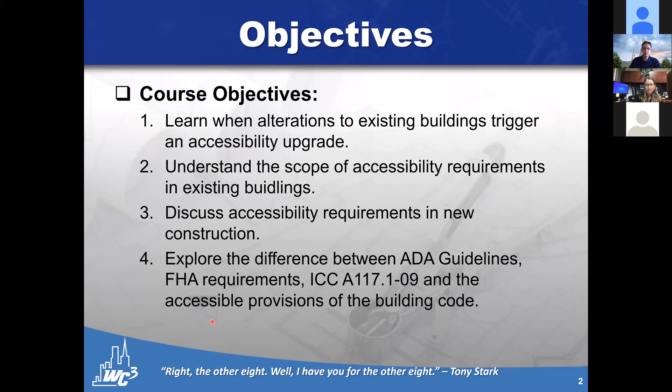You'll notice down at the bottom of my screen, it has absolutely nothing to do with the rest of the presentations, but I like to watch movies. So there are random movie quotes at the bottom of most screens. Most of the time they have absolutely nothing to do with the slides, but if you get bored, because talking about building codes all day is the most exciting day you guys are going to have, right? So if you get bored, just read the quote at the bottom of the screen and chuckle if you get the reference. If not, I just do want to warn you, if you get all the references, that means you're pretty much as nerdy as I am, so be careful there.

All right, jumping right into it, we're going to look at these 3 different books today. We're actually not going to jump too far into this book, the ICC A117. We don't have enough time to jump into it. This is the reference standard, and I'll talk about it a little bit in a second. But we're predominantly going to talk about building code requirements for accessibility, which are going to be found in the IBC and for existing buildings under the IEBC in the 2018 codes that are adopted currently in most jurisdictions in the state of Nevada.

Looking at this, we're going to talk about accessibility. I want to highlight here where ADA and accessibility comes from. So this is a standard that's put together. It still is noted by ANSI, the American National Standards Institute, but it is now officially under the title ICC A117.1. The latest version is now the 2017 version, but that is not being referenced until the 2021 building code. So the currently referenced standard in the 2018 code is this one, the 2009 ICC A117.

Now, this is a standard that was put together by a panel of committees for persons with hearing impairment, the deaf and blind community, as well as those in wheelchairs, little people, and other groups of persons with disabilities, who have come together with code officials to create a building code standard. This standard was mirrored, I'm going to get the date wrong because I don't have it on my slide today, in the mid-90s with the ADA guidelines.

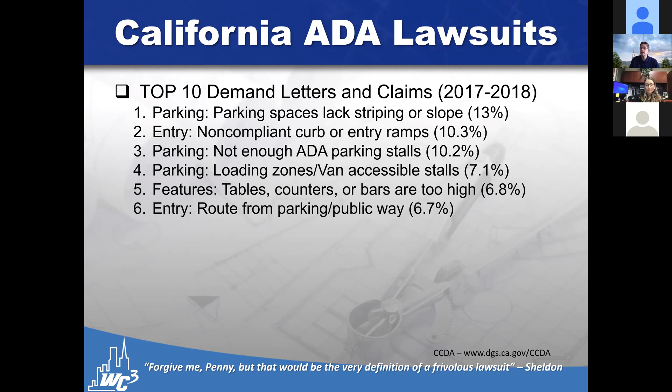The next one is that there's a non-compliant curb or entry from the parking lot to the building. 10% of all lawsuits are that one. That there are insufficient ADA parking stalls accounts for another 10% of all lawsuits. That there are not adequate loading zones or van accessible stalls accounts for an additional 7%. Interior tables, counters, or bars are too high is 6% of the lawsuits. The accessible entrance to the building is not on an accessible route from the public way. It accounts for 6.7% of the lawsuits.

Inadequate signage for parking stalls notifying which ones are accessible is another 5.3%. General violations, interior features not meeting requirements, account for about 4% of lawsuits. And the route having incorrect door hardware or thresholds accounts for 4%. And finally, service equipment, pools account for 2.2%, rounding out the top 10. Now, this is not all lawsuits, obviously, but these top 10 items account for 70% of all lawsuits filed in the years 2017 and 2018. And so you're going to see that the majority of lawsuits will be one of these top 10 demand items.

Now, the next one that's kind of frightening is that over 50% are related to the site, not the building itself. And the reason I say that's frightening is because, quite simply, whenever I do a TI review, I often ask, I need a site plan. I need to know what's going on with the exterior of the building. How do you get into this building? And the response is, well, that's outside the scope of my review. Well, this leads to the question, is it outside the scope of my review? If you're not updating the site as part of the interior remodel, you're leaving yourself and the owner open to over 50% of all lawsuits.

The reason being is it doesn't matter how nice and accessible your toilet room is if you can't even get into the building in the first place. And so predominantly, these are where the majority of lawsuits are going to occur. We need to be very cautious about making sure that the site plan is up to date and meets code. And we'll talk about when that is not required as we look into the IEBC.

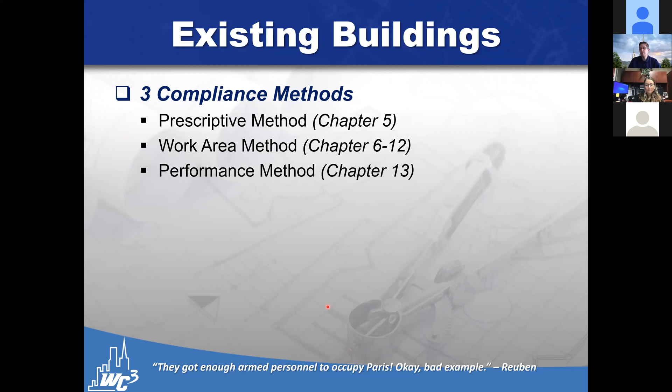So there are 3 different methods. We have the prescriptive method for dealing with existing buildings, work area method, and the performance method. Under the 2015 code, there were separate accessibility provisions for each of those, depending on which method you used. As of the 2018 code with the reorganization, now accessibility requirements are found in section 305, and these accessibility requirements are the same regardless of what method you use.

So if you've got an existing building, you'll go to IEBC 305, and this gives you the scoping requirements for what accessibility provisions you have to meet, regardless of whether or not you're doing an addition, an alteration, change of occupancy, and what method, prescriptive, work area, or performance, that you're going to use for the rest of the design. Everything's going to come out of that section of code.

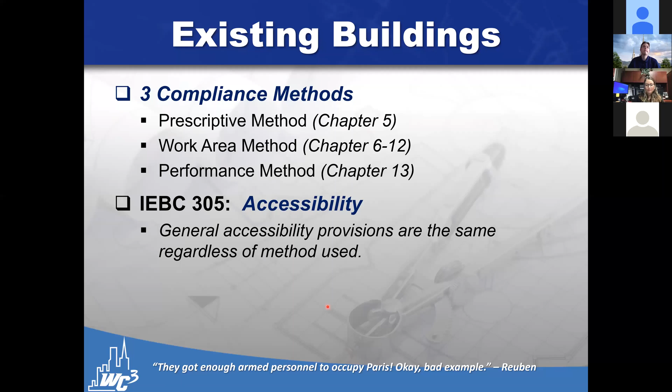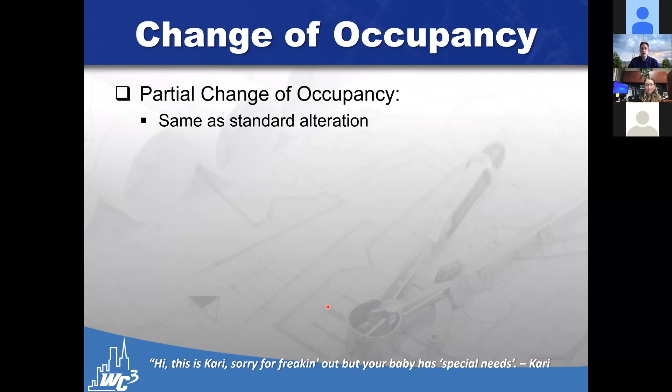So looking in IEBC, the first one we're looking at is a partial change of occupancy. If you've got a building, you're modifying a partial change of occupancy. The most common one I see here is I'm going to change a portion of a warehouse into an office space. That's a change from an S occupancy into a B occupancy. That would be the exact same as if it was an alteration. So the portion of the building that's changing occupancy counts as an alteration, an altered space.

If you provide a complete change of occupancy, meaning the entire building is going to change. This is maybe I'm taking an old grocery store and converting it into a gym, or I'm taking an existing office building and I'm going to turn it into a hospital or a doctor's facility. So anytime I make a modification from one occupancy into another and I change the entire building, this comes into play. I still have to have all new and altered elements be accessible, but in addition, now I must also provide at least one accessible entrance to the building.

I must provide an accessible route to the primary function of the building, and we'll talk more about primary function in a bit. I have to provide adequate accessibility signage for restrooms, accessible doors, entrances, and so forth. I must provide accessible parking where parking is provided. Now, this is not saying where accessible parking is provided, it must be compliant. It says where parking is provided for that facility, accessible parking must now be provided for that facility.

If a loading zone is provided for that building, or a drop-off zone, like a porte cochere at a hotel or at a hospital entrance or so forth, we'll talk more about that when we get to scoping on the IBC, it also has to be made accessible. And so these items that may be existing elements now have to be upgraded to meet the plan.

Notice that we are going to upgrade several site features, accessible parking and loading zones, as well as an accessible route and entrance into the building, all based on interior remodeling only. So the scope is now going to be expanded to include site work because they have a complete change of occupancy of the interior of the structure.

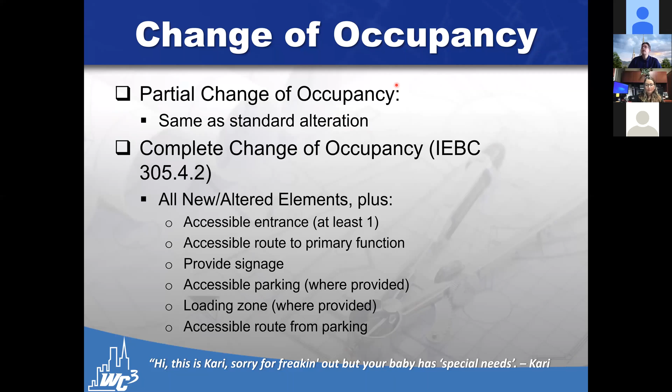As we modify these existing buildings under FHA guidelines, there's no requirement to bring these old outdated type B units into compliance. So there's no accessible route upgrades. However, you would still need to make at least one level accessible and may need to upgrade some of the type B units inside the building, but no accessible route to those units.

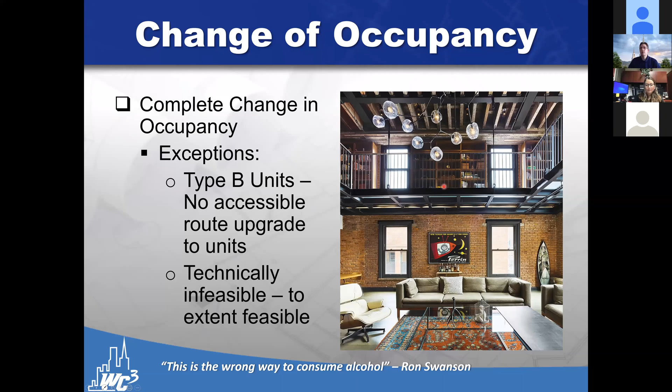The other one is technically infeasible, where it becomes technically infeasible to meet the current requirements of the code. You're only required to move it forward to the extent feasible.

Now, looking at technically infeasible, the problem I run into is it's often misinterpreted. What technically infeasible says in the building code is that full compliance would require alteration of a structural load-bearing member, or is not possible due to site constraints, typically meaning property lines or other things where you don't have the ability to adjust items.

I want to clarify that because it does not mean it's too expensive, it's not part of the scope of work, or it's inconvenient. I've had a lot of people say, well, remodeling the bathroom is going to cost more than my entire remodel. Well, that's great, it's expensive, but unless you have to move a bearing wall to update the bathroom, it's not technically infeasible. It's only technically infeasible if you had to move a bearing wall, or if there physically isn't space inside the building without moving a part of the building to do so.

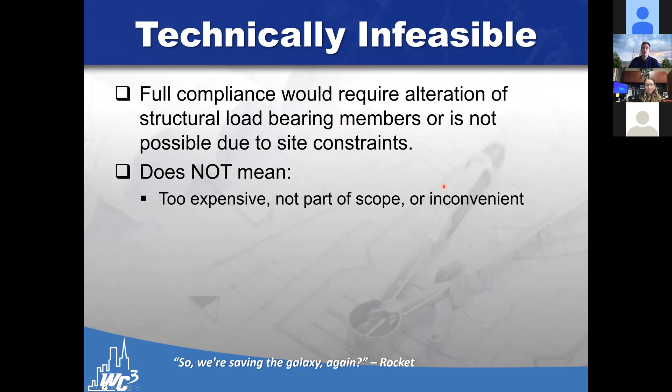The other point is technical infeasibility only applies when specifically referenced as an exception. So for the additional requirements in the IEBC for a change in occupancy, for example, it references technical infeasibility, and you can get out of those requirements slightly because it's technically infeasible.

Again, remember, just because it's technically infeasible doesn't mean you're exempt entirely. You still have to bring things up to speed, up to code, as much as is technically feasible.

So a stair may not have the proper width to count as an accessible means of egress, but you might still end up having to provide an area of refuge at the top and bottom, two-way communication devices, and so forth. You may not be able to install an elevator, but you would still have to install grab bars and so forth in the bathroom.

So again, we're going to look and see what scope there is. If there is anything that you aren't going to be able to meet the requirements for due to technical infeasibility, you just need to specify what the infeasibility is, what structural load-bearing members or alterations cannot be done due to site constraints, and then what methods or what extent it can be completed, what is feasible as part of that construction.

Please realize that there are some upgrades that may be required even if they're technically infeasible. So even though you will require modifications to the structure, there are certain times in which the code will mandate them. Again, you can only use technical infeasibility to get out of a provision if the references directly say so. There needs to be an exception in the section you're looking at.

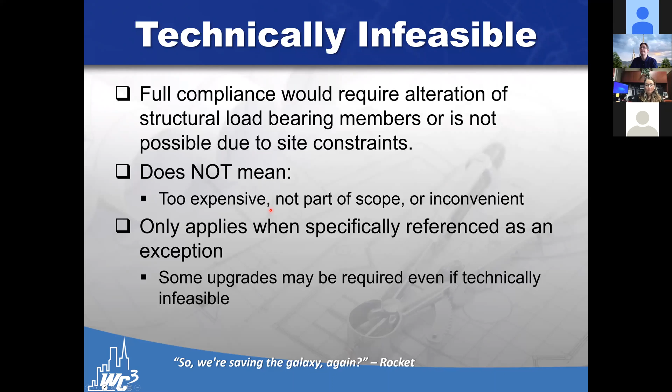But when we add additions and we're looking at things, the way the code addresses that is all new elements, everything inside that funky looking building being added on, has to be fully accessible. And if I alter a primary function, or the addition includes an area of primary function, I'm going to have to meet the primary function requirements, which we'll talk about shortly.

The exception is if it's not located on an accessible route. I should clarify that - it's not that an accessible route doesn't exist, because there are several existing buildings that don't have an existing accessible route. But if an accessible route is not required to that space, and you're in a location of a building that does not require an accessible route, you don't have to bring that section of the building up to code. You do not, for alterations, have to provide an accessible means of egress.

Now, this is a change in the 2018 codes, whereas before, for all additions, alterations, and modifications, you never had to provide an accessible means of egress. Additions do have to have an accessible means of egress now. You do not have to do it, though, for alterations.

Privately owned type A units.

Type A units are unique to the building code. If I'm in a type A unit and I own it myself and do a remodel, I only have to bring it up to type B. Type A means it can be converted into a fully accessible dwelling unit. But if I'm not disabled, I'm not required to make my unit a type A. So even though it was a type A when I bought it, if I modify it as the owner builder, I only have to meet the type B requirements.

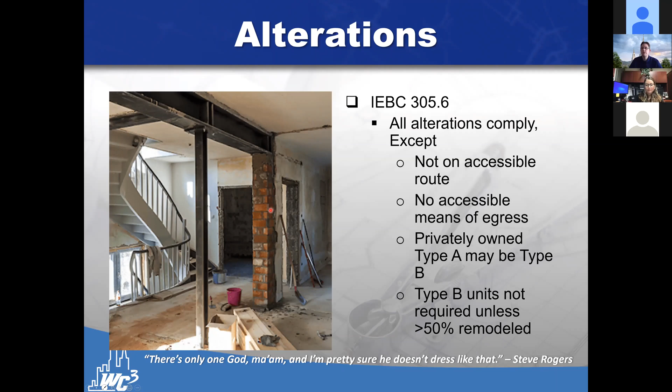So looking at this, the next item is entrances to buildings, and we're going to look at scoping. When I'm doing an alteration, there are provisions limiting the scoping. Normally, if you're modifying an entrance, the building code says you have to make it accessible. Except if I'm modifying a secondary entrance to a building, and there's already an existing accessible entrance, then I don't have to make this one accessible.

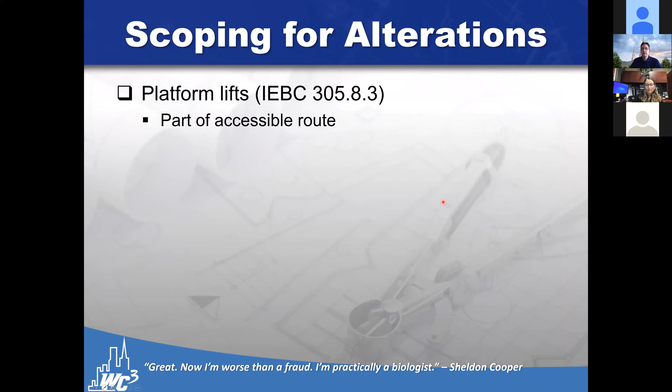If I install a new set of stairs or an escalator in the building, I always have to include an accessible route, so I have to install an elevator. The exception is if there were no major structural modifications. The idea is, if I'm cutting a hole in the floor and moving bearing walls, adding beams and posts to install a stair that is not accessible, then I can also cut a hole in the floor and add beams and columns to install an elevator or lift to make that route accessible as well.

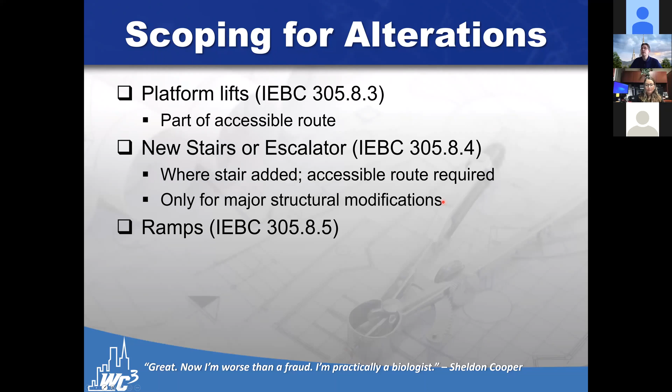When modifying existing ramps, particularly curb ramps, I'm allowed slightly steeper slopes. For ramps up to 3 inches, I can go 1:8, and for ramps up to 6 inches in height, I can go steeper than 1:12, but not more than 1:10.

When modifying dwelling units, only new or altered dwelling units count toward determining the number and type. So I may have a large existing facility and add on a new dwelling unit or group of units—only the new dwelling units count when determining the number of accessible, type B, or type A units I'm supposed to install. I ignore all those that are already on the site and existing.

Jury boxes need to have a wheelchair space. The wheelchair space is not required if it's an existing facility.

Toilet rooms - you can get out of toilet room modifications where it is technically infeasible. The code says that if it's technically infeasible to update the toilet room, you can install a single unisex toilet room instead of updating the bathroom. You can still count all the fixtures inside the non-accessible existing toilet room, except you would have to provide a new unisex restroom on the same floor level.

There was a question about platform lifts in a tenant improvement. Yes, inside of a tenant improvement, a platform lift counts as an accessible route.

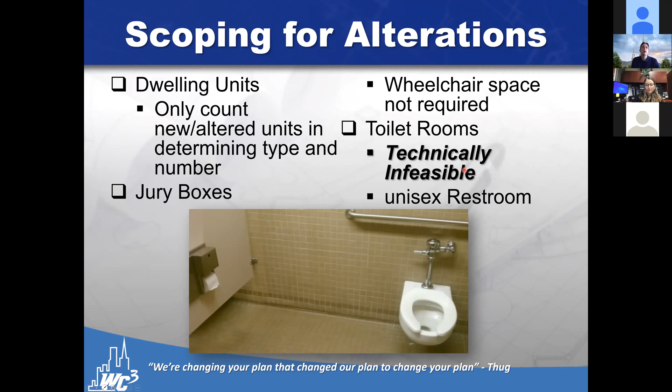Dressing rooms - if I'm making modifications to a building that includes dressing rooms where it's technically infeasible to update the existing dressing rooms, I can add one per gender that is accessible, but it must be located on the same level and in the same vicinity.

Fuel dispensers do not have to be made accessible, existing fuel dispensers. Thresholds - we're going to allow a slightly higher threshold in existing buildings, and existing amusement rides being modified do not have to be brought up to code.

It'd be really hard to come in and say, oh, we're remodeling the Matterhorn at Disneyland, now you have to make a wheelchair space inside this ride and completely change the design of that existing facility or ride. So existing rides do not have to be made accessible - the ride itself does not have to be altered in order to bring it into compliance.

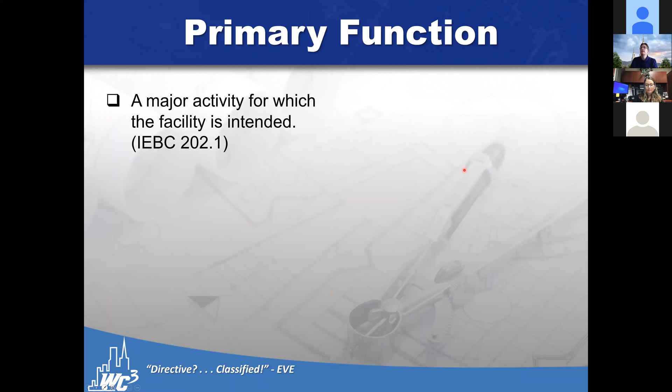Primary function - primary function is the major activity for which a space is intended. This is where things often get confused, because the code says that if I alter an area and it includes an area with the primary function... a lot of people confuse primary function with change of occupancy.

If your alteration happens in an area that contains a primary function, it doesn't matter if you're changing it - that would make it a change of use, which we cover in the change of use section. But if you're altering an area that has the primary function - for example, if I were to change this open cubicle office area and remove these cubicles to install built-in office areas, I would be making an alteration in an area containing the primary function, because this is an office and I'm altering an office space. So now I would fall into compliance. While it was an office before and it's an office still, I now have to meet the primary function requirements.

Some exceptions are if I'm modifying closets, bathrooms, or stairs - these are areas that are not part of the primary function of a space. So alterations of those will not trigger an alteration inside an area containing a primary function.

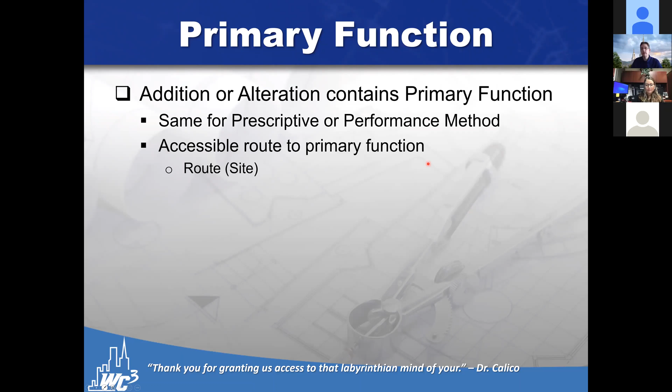So now they had to put in curb cuts and everything else because they were altering the sales floor of a convenience store. Parking: if there's parking provided, they now have to update the accessible route from the accessible parking to the building entrance. If there's no accessible parking, they need to provide accessible parking to give them a route to the entrance of the building. They need to provide an accessible entrance into the building, and they have to provide an interior route from the accessible entrance to the altered location.

So if you're on the second floor of a building, this interior route requirement is what's going to trigger you to have to install an elevator. If the building requires an elevator or requires an accessible interior route, you'll need to install it. So an alteration on the second floor will require an elevator or a lift to get you up to that second floor level if needed.

In addition to that, accessible toilet facilities must be provided. Now, to determine the number of toilet facilities that have to be accessible, this doesn't mean all the toilet facilities on site, but the toilet facilities required for the space being altered. So if I'm altering a conference room with 300 people in it, I would find out how many toilet rooms are required, men's and women's, for that 300 occupant space being altered. I must then provide accessible toilet facilities somewhere inside the building for those 300 occupants and an accessible route from the space being altered to those toilet facilities.

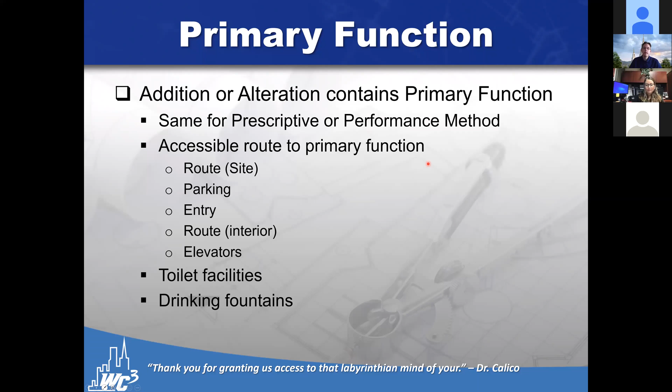Now, there are some scope limitations, because it wouldn't seem drastically fair if all I was doing was replacing some outlets and light switches in my office on the second story of a building to have to install an elevator, do some curb cuts, and everything else.

So the code says, first of all, if all you're doing is hardware modifications - windows, outlets, signage, etc. - none of that's going to count, even though it's in an area of the primary function. It doesn't really count as an alteration and will not trigger an updated accessible route.

If I'm just replacing electrical equipment or HVAC equipment, I don't have to modify the accessible route, add bathrooms, etc. to that space. If I'm doing fire protection, sprinkler, fire alarm system work, or abatement of hazardous materials, again, none of those items will trigger this.

And finally, if all I'm doing is alterations to improve accessibility - for example, I had a church and they wanted to add an accessible ramp inside the building to lead up to the rostrum so that people could get up onto the stand and speak. So they were adding this accessible route. Now that's obviously inside the worship room, the chapel, which is the area of the primary function.

And so it would typically trigger an accessible route - they have all the seating in there that would need to have accessible seating provided and so forth. But instead, the code says, no, no, no, all they're doing is adding an accessible ramp. So the scoping limited them to just those accessibility upgrades. Now, if they added other things, if they replaced the seating, if they modified something else inside the room, those would then trigger the accessible route upgrades.

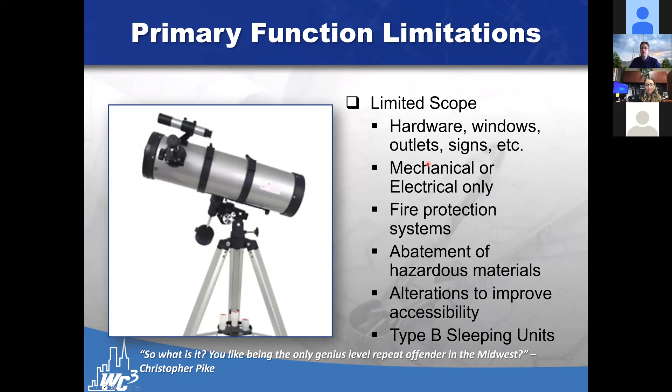So the first limitation - if you don't meet one of those exceptions - say I am making an alteration to a building, I'm going to add an office. Like right now in my office, we want to add a new door. We want to knock out a wall so that I have direct access from my office out into the bullpen where everybody else is working. So we're going to add a door there.

Well, obviously it's not going to cost me much money - it's going to be a couple grand for us to install a glass door and a window. But if I was on the second floor of the building, I now have altered a primary function, because obviously an office is the primary function of an office space. And so now I would have to install an elevator if we didn't have one already in the building. Well, that seems ridiculous.

A $2,000 remodel requires me to spend $50,000 to install an elevator in an existing building. The code says you're not required to exceed 20% of the cost of the alteration to the primary function. So what we're looking at is the primary function, the area that I'm altering inside the primary function.

I'm going to take the cost it takes to modify that, and then the cost of upgrading bathrooms, the accessible route leading to that space, the site plan, any of those items that need to come into play do not need to exceed 20%. Now, I do have to spend at least 20%, but they can exceed. I don't account for the cost of those in the calculation.

So I don't go in and say, oh, I'm doing $2,000 to modify the door and another $50,000 to install the elevator. So is it more than 20%? No, it's 20% of the $2,000 remodel that I was planning on doing, which would lead me to say $400 is the maximum I have to spend on the expanded scope of the accessible route.

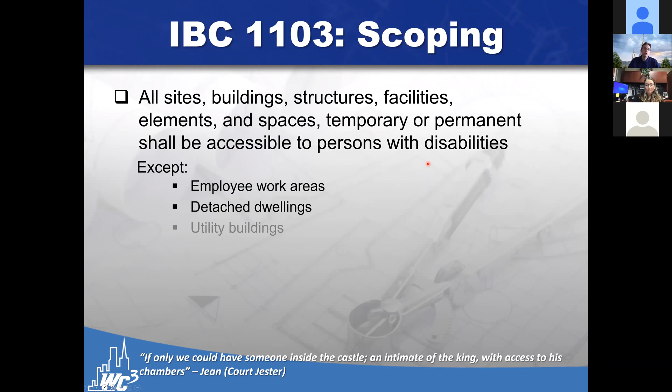And then it gives me a list of exceptions: employee work areas, detached dwellings, utility buildings, construction sites, raised areas, limited access areas, equipment spaces, areas in places of religious worship, highway toll booths, Residential Group R-1, daycares and R occupancies, detention facilities, and walk-in cooler freezers. So there are limited scoping requirements if I'm in any one of these items, and I'm going to talk about some of the most common ones.

One I will note is the highway toll booths; it used to say single occupancy structures. They determined that that wasn't a sufficient limitation, so single occupancy structures have to be made accessible, with some exceptions on highway toll booths, which we'll talk about in a moment.

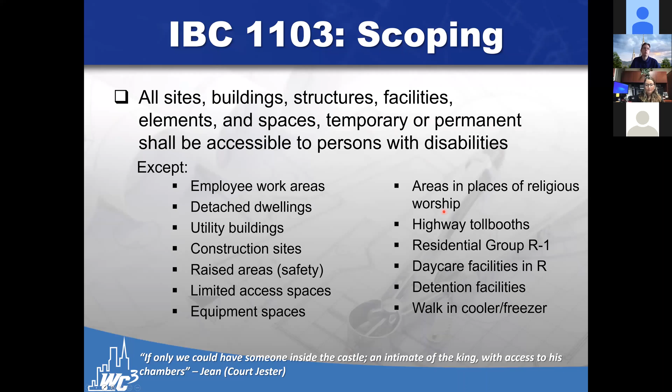So first of all, looking at employee work areas, the number one item I get coming in from an owner is, this is for employees only. Why do I have to make it accessible? I don't hire persons with disabilities. Well, I hope they don't tell me that, because that's illegal; they can't discriminate. That's discrimination. But we'll assume that based on their work requirements, they meant that they have to have fully able-bodied staff.

That's great. The code still requires that even if it is just for employees, you still have to be able to approach, enter, and exit the space. So you have to get in, get around, and get out in order to use the space. And then all public areas. Now, again, they say it's only open to employees. Well, public is any space such as break rooms, bathrooms, or reception areas in which the public might come in, or portions of the building that are not being used for work-related purposes. Now, the intent of the code here is the ADA guidelines, and we're stepping out of the building code, looking at federal law now.

ADA says I have to make reasonable accommodations to my employees. So if I hire a person with a disability, I must make reasonable accommodations for that individual. And so the building code says we're not going to force an employer to make their workspaces and the work area fully accessible on the off chance that they hire someone with a disability which requires that specific alteration.

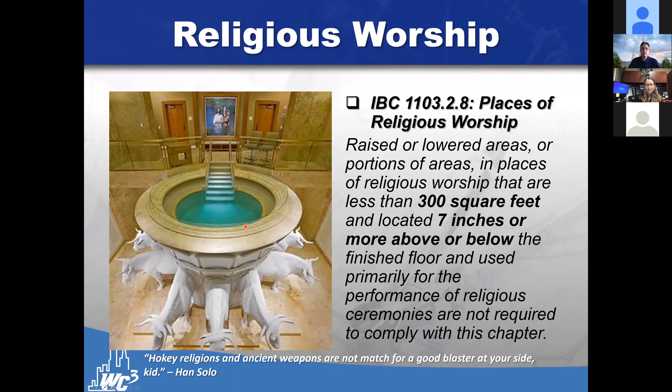General equipment spaces, anything that's a maintenance room, anything that's going to have maintenance equipment in it, something that's only going to be used by maintenance personnel, such as an HVAC room or even perhaps a janitor's closet. These spaces are not required to be accessible under the building code requirements.

Booths, highway toll booths, where access is provided only by bridges or above or below in a tunnel, are not required to be accessible. And so as we look at it, the concern is if I make this highway toll booth accessible, it has to be a wider booth. And as I make that wider, I now have to make the whole street wider. So there's a long push not to make these items larger or accessible. But the code has clarified and come in and said that this is all to be fully accessible.

Just think about it. As long as they only have an accessible route coming straight across the street. So if I park my car as an employee over here and I walk across the street to get to this toll booth, then a person in a wheelchair could park here and come across the street in a wheelchair. Now, if the only way to get to this toll booth was if they had to come up a stair over here, across the bridge, and then lower down into it, it'd be way too expensive. And so the code is now going to allow on the structural side. So that's good.

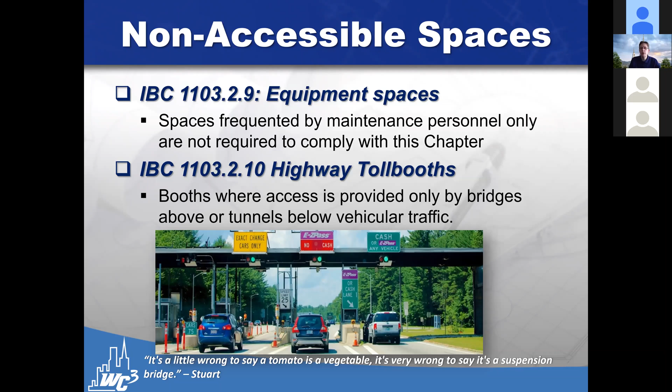All right, next up. Double swing doors, can they be used as egress, like for commercial kitchen doors? So a door that swings both directions can be used for egress, but that's kind of an egress requirement. That's capped to serving an area of no more than 50 occupants as a door that swings in both directions.

A new valet drop-off area that can't be raised to a zero curb due to elevations at street level. So I'm adding a valet and I don't have a curb. The issue you're going to run into is that the drop-off zone has to be adjacent, and so if you were installing a valet drop-off area, you would have to remodel the site, either cut the sidewalk down or modify it to get you into a situation where the drop-off lane is at the same elevation as the drive lane. And as long as you can create the drive lane and the drop-off lane at the same elevation, you could do a curb cut up to a sidewalk or otherwise address it. But if a valet drop-off zone does not exist and you want to install a new one, you would have to make it compliant somehow.

I'm altering and expanding my owner's office on the second floor of the apartment building. Do I need an accessible bathroom and route? The area is 700 square feet and the tenants go to the rental office on the first floor. So the owner's office is in an apartment building. The question comes down to, is that the primary function of the building? If it's an apartment complex and there is a leasing space, I would say you're pretty safe in betting that the leasing space is not the primary function of an apartment complex. And so you might be able to say, hey, no, I don't have to meet that.

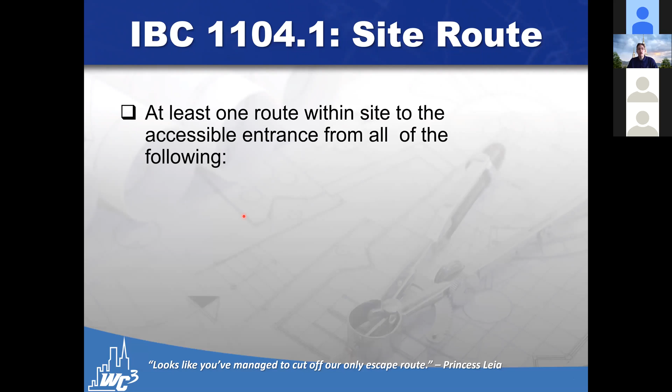All right, looking at buildings in general, when I take a look at a site, at least one route within the site has to provide an accessible entrance. So I have to provide a route from all of the following to the building entrance. One, if there's a public transit - that little keynote 20 is for a bus stop - I have to have a route from the bus stop all the way over to my building entrance.

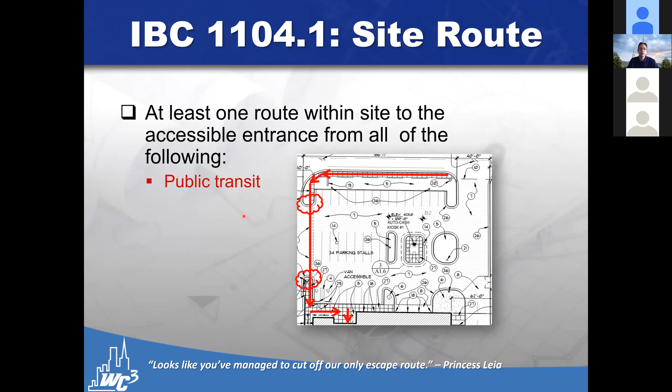Notice I'm missing curb cuts as I go along there. The sidewalk would need a curb cut down to get to the asphalt to cross the parking lot, and then another curb cut getting back up. The accessible parking at the main entrance of the building has to have an accessible route getting me to the building entrance. If there's a drop-off or loading zone, I have to have an accessible route there. I have to have a route from a public street.

Now, there is an exception: if the only way to the building is a vehicular route, which happens a lot for industrial complexes where the only way to get to the building is to drive up to it, then in that situation you don't have to have an accessible route. But most buildings, even Walmarts, you can walk up to them. And if you can walk up to them, an accessible route is required from at least one of the public ways to the building entrance, and that includes public sidewalks.

A question I get asked all the time: notice the curb cuts are missing on the sidewalk. If it's part of the city's jurisdiction, the city is responsible for meeting accessibility requirements. But if you're installing it as part of your remodel or as part of the scope of your project, I'd strongly recommend that instead of just meeting city guidelines, you meet ADA guidelines as well, just because you have control over it.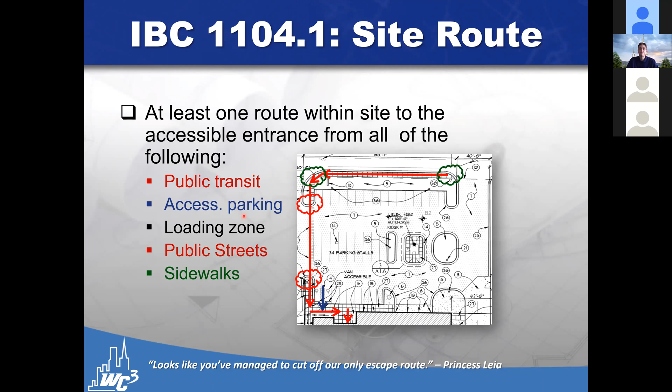So as long as the total area of all the mezzanines in the building, or the total area of all the stories in the building that are not on an accessible route, is less than 3,000 square feet — that's what 'aggregate' means, total — they don't have to be accessible. So you're allowed up to 3,000 square feet of stories or mezzanines in a building that are not on an accessible route: stories and mezzanines not containing accessible elements.

Now, this doesn't mean — and we touched on this earlier with a question we had — that just because you provide the same features on another story, you don't have to have accessible features on that other story too. When the code says a story does not contain accessible elements, this is similar to an apartment complex that has no elevator and just has stairs. The dwelling units on the second, third, or fourth floor of that apartment complex are not required to be on an accessible route, and because there's an exception in the code saying they're not required to be on an accessible route, there are no accessible elements on those stories — therefore an accessible route is not required to those stories.

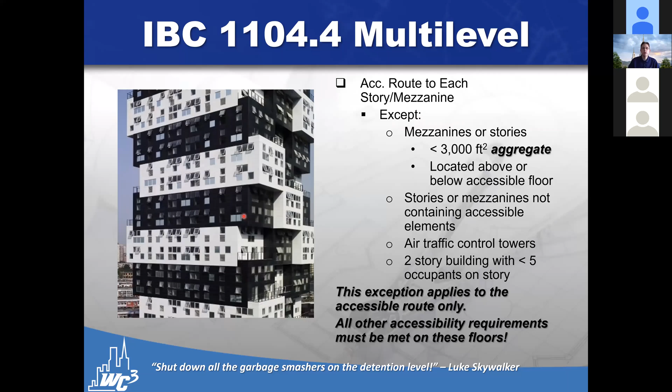So if I do have to provide an accessible route to my stories, how do I do that? There are 4 options in the IBC. The IBC allows you to use a ramp at any time. I have now finally, after 10 years, seen one second floor of a building with ramp access. It's not very common that you'll do a story-to-story access, but this one had a ramp servicing the 2nd floor. So yes, you can do it by a ramp, but it takes a lot of space.

You can use a limited use, limited access lift, or a LULA - that's just fun to say. LULA, LULA, LULA. It's a smaller elevator, and that is allowed anytime to provide your accessible route, or you can provide a full-size elevator. Now there are occasions in which a platform lift can be used.

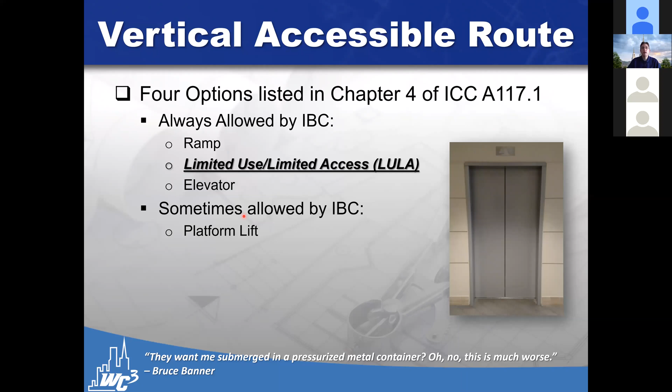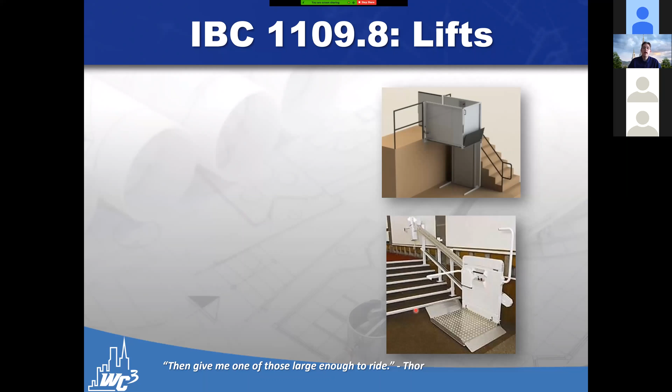This is also a platform lift. It goes on a stair and takes you up as a stair lift, and it can qualify as well as a platform lift. Be very careful about these, because that lift is not permitted to reduce the required egress width of the stair, nor is it allowed to infringe on the required handrails for the stair. So you have to have a handrail on both sides, and if you have more than 30 inches away from the handrail, you might have to have an intermediate handrail. So this is a wide enough stair, this will probably work, but just be aware that these cannot impede the egress requirements if you're going to install them.

Yeah, there are issues with LULAs and platform lifts. Someone's pointing out the rise requirements for each state - yes, depending on how your state regulates elevators and lifts, there are situations where there may be restrictions on when they can and can't be used based on where they're at. Also be aware that there's a difference between a lift for supplies and a lift for individuals. There are maximum lift requirements and maximum rise requirements for lifts, so there are limitations where lifts cannot be used because maybe your story-to-story height is too high, or because you're not using one that's approved for persons. So there are things you do need to be careful for - they're not a catch-all. Thank you for bringing that up.

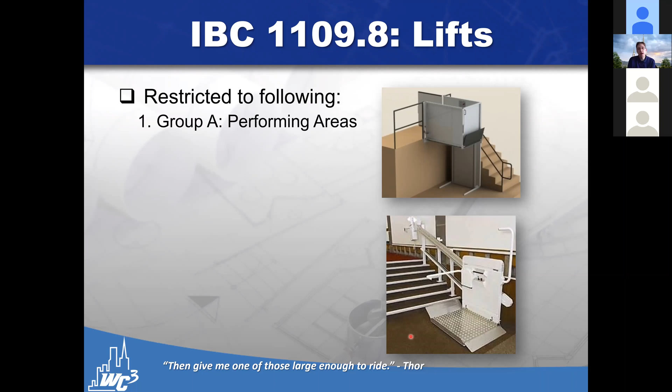So where they are allowed in new buildings is in Group A performing areas - if I'm trying to get to the stage from the dressing room, I can use a platform lift. For dispersed seating, if I'm trying to get to my wheelchair seating inside an assembly area, I can do that. If I have an area of the building that has an occupant load less than 5 individuals, I can provide a lift to that space.

For dwelling - inside individual dwelling and sleeping units - if I have a mezzanine that needs to have an accessible route inside my dwelling unit, I can do that via a lift. For courtrooms, I can get to and from any of the elevated areas in a courtroom.

Amusement rides, they're very common in amusement rides for transfer systems. Playground equipment is another location to get you up to elevated surfaces. Player seating, if you need to get lowered into the dugout, this is an option. Boating or fishing piers, the same.

This last one is probably the most common location I see them in new construction: the exterior has site conditions which don't allow things to be done. I see this all the time in downtown areas particularly, and we live in a nice mountainous area here in Utah, and there's plenty of mountains out there in Nevada as well, where zoning requirements force you to build right up next to the public sidewalk. But there's too much slope, and so we have these large stoops outside, but there's not enough room to get a ramp outside to get you up to the building entrance as you're changing elevations on a steep hill, because the public right-of-way is on a 6% or a 7% slope.

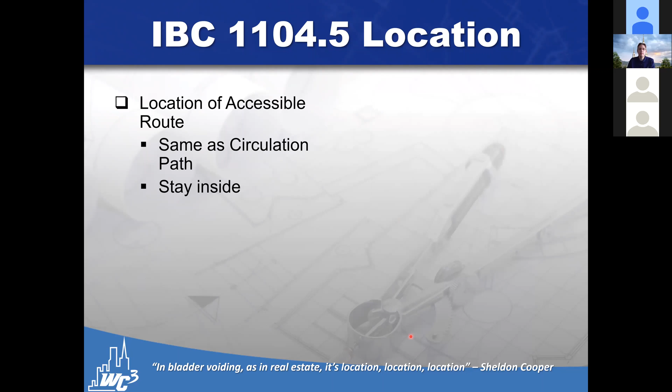Location of the accessible route: it has to be the same as the circulation path. If the circulation path is inside the building, the accessible route must stay inside the building. I run into this problem all the time. I cannot go outside to go up a ramp to get back into the building. If the person inside the building can get around inside the building, the person that's disabled has to be able to do the same. I can't pass through kitchens, storage rooms, restrooms, or closets. Similar to egress, the concern is those spaces being congested and not allowing proper movement.

Public entrances: 60% of all public entrances have to be made accessible. This is a wonderful magic rule that says if I have 2 entrances, both have to be accessible, but if I have 3 or more, I only have to have 2, or a percentage thereof. That's why the magic number came in at 60%.

If I have an entrance from a parking garage into the building, it has to be accessible. So watch out for this. You cannot have stairs going from the parking garage into the building. Enclosed egress stairs, yes, you can have that—that's not really the entrance. The entrance, we're going to say, is the elevator. But you can't have access stairs leading up into the building at one location. So from the parking garage—again, this is an enclosed parking garage which is part of the structure, or an open parking garage which is part of the structure—their entrance to the building has to be accessible.

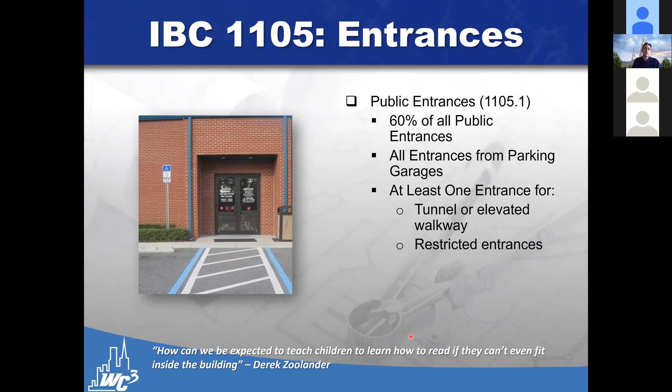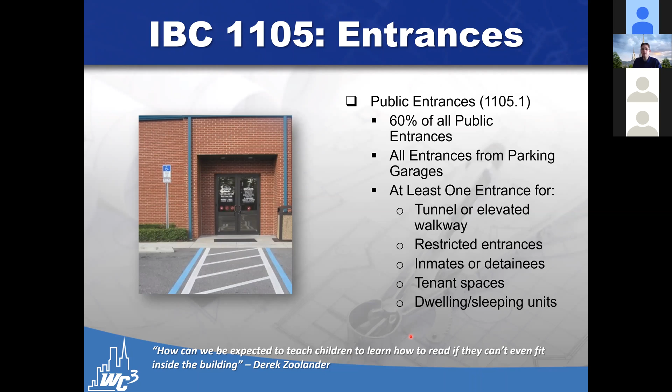Where the following are provided, at least one has to be accessible: if I have an elevator or a tunnel getting into the building, they have to be accessible. Restricted entrances are any entrance which requires a key or a key fob to get in. Watch out for these, particularly on employee-only entrances, or tenant or resident-only entrances for hotels and apartment complexes. So at least one of the restricted entrances has to be accessible. For inmates and detainees, each individual tenant space has to have an accessible entrance, and all Type A, Type B, or Type Accessible dwelling units have to have an accessible entrance.

Parking and passenger loading facilities—I think you guys have all seen this table before. What I want to highlight is the separate calculation for each parking lot and each structure in the parking lot. So if I have a front and rear parking lot, I would add them up separately. I'm not normally picky on that, but if I had a surface parking lot and an enclosed parking garage, those would add up separately in the table. I'd go to this table once for the surface lot, and once for the parking garage.

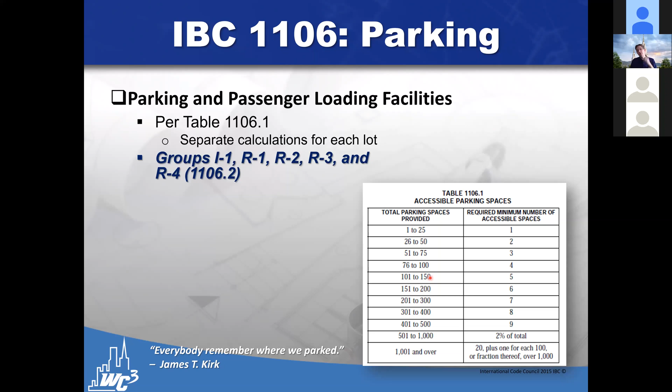In I1, R1, R2, R3, and R4 occupancies—these are ones that have dwelling units—we'll have some separate requirements. In hospitals, 10% of all stalls in hospitals have to be accessible.

If they have rehabilitation, this is physical rehabilitation, not drug rehab, guys. For physical rehabilitation facilities, 20% of the stalls have to be accessible, and then 1 out of 6 of those stalls have to be van accessible, marked with the van accessibility requirements.

I have a second level boarding house that we are upgrading electrical and plumbing. Do I need to provide a lift to get up to the existing stair? Going back to the IEBC, as long as your remodel is only plumbing and mechanical, HVAC and plumbing, the code says no. Now, if you're upgrading a bathroom, you would have to make that bathroom fully accessible, but as long as you're limiting it to mechanical and plumbing, you do not have to upgrade your accessible route.

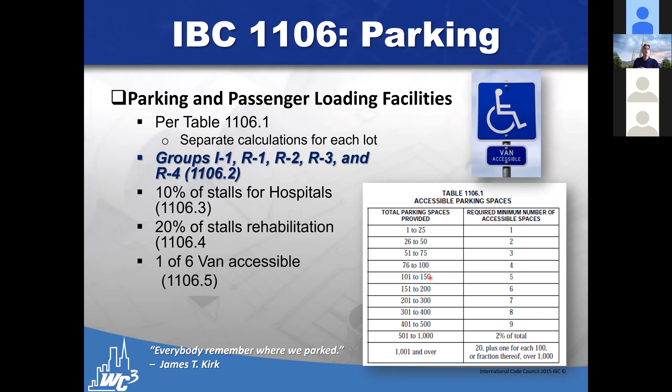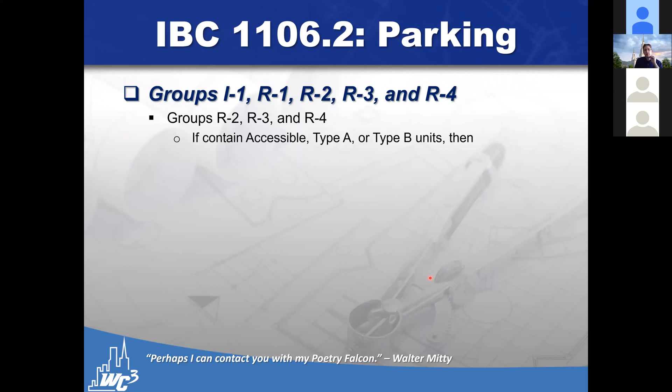For I1, R1, R2, R3, and R4 occupancies, if you have an accessible type A or type B unit in the facility, then 2% of each type of parking stall has to be accessible. This is 2% of tenant parking, 2% of visitor parking, 2% of covered parking, 2% of garage parking, 2% of private garage parking, and 2% of underground parking. Just be aware it's 2% of each different type of parking facility you provide.

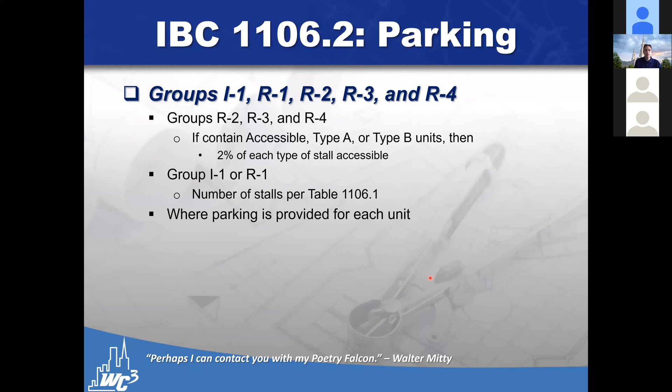I1s or R1s are more public facilities, and we go back to table 1106.1, but clarify that you have to have at least 1 stall for each of the type A or accessible units provided for each unit. So if I have assigned stalls, say in my R1 occupancy in a hotel or my apartment complex, if every single unit has an assigned parking stall, then the stall assigned to an accessible or type A dwelling unit must itself be an accessible stall. That applies even if it exceeds the 2%, or exceeds the number in the table — that doesn't matter.

There are several R1 occupancies that may require a higher level of accessible units, or I1 facilities that may require it, and R4s where up to 50% of units might be accessible. One accessible stall must be provided if a parking stall is designated, so be careful about designated stalls. This applies to parking within or beneath the building — watch out for garages in apartment complexes.

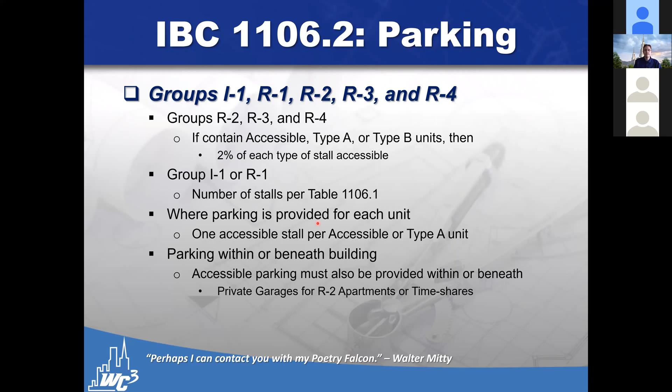Another question: will I touch on EV parking? Only because you asked me to, John. The 2018 code has new provisions stating that EV parking, where provided, shall be accessible per Chapter 11. But if you read through Chapter 11, you'll find no reference whatsoever to EV parking, so scoping-wise it's up to the building official's interpretation. If you want good references, I'd recommend the CBC, which has good provisions for EV parking, and I believe the 2021 IBC has some provisions too, though I haven't read through it closely enough.

EV charging stations are somewhat problematic because they are not parking stalls — I drive an electric vehicle myself, and there's always a sign saying 'for charging only.' For example, I went to an all-day convention and ended up not charging my car because I'd have to park it, charge it for 2 hours, then relocate it since you can't leave it there longer than it takes to charge. That's why treating these as regular parking spaces is inappropriate — if you labeled one of your van accessible stalls as a charging station, you've essentially lost an accessible parking stall, because the disabled person can only use it while charging, not keep their vehicle there at all times. What is clear is that the charging station itself must be accessible.

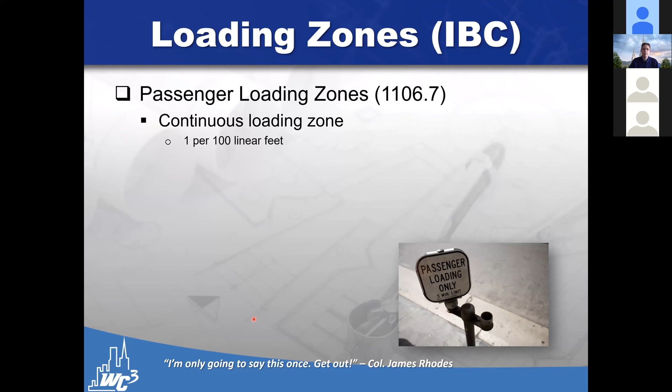Passenger loading zones, these are my drop-off zones. Where I have a continuous loading zone, I have to have an accessible loading zone for each 100 feet of continuous loading zone. Medical facilities, this is the one place in the code where it requires it and says whether or not you plan on installing one, you have to have an accessible drop-off zone at a hospital that provides 24-hour care. If you have valet parking, you also have to provide a passenger loading zone.

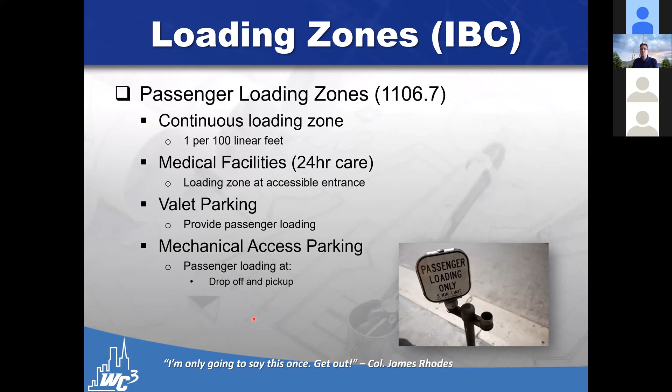Now, I didn't see this a long time ago when I started putting this slide together, but mechanical access parking is becoming much more popular. This is the automobile vending machine. And in all honesty, the building code considers it that, a giant vending machine, or more accurately, a giant piece of equipment. As you look at it, I've got 8 cars, 9 cars, 12 cars sitting inside this facility. This is not 12 parking spaces.

The city zoning enforcement might tell you that that qualifies for 12 cars. But as far as the building code is concerned, this is not even a parking space. This is a piece of equipment that cars are put into. And so if I have one of these facilities, I don't count these towards the number of parking spaces I have and determine the number of accessible stalls I need to provide.

What the code says is that I have to provide a passenger loading and drop-off zone, an accessible drop-off zone at the drop-off and pickup location for these vehicles. And so if you drive in and pull out on the same side, so if they were to drive in over here and then pull out over here, I would have to have a drop-off zone over here. Somewhere where I can pull up, let grandma out of the car, and then go park it, and grandma can go get into the building.

And then when I'm going to pick up grandma, as long as I can pull out to the same side, I'm fine. But now if in this parking garage I can pull in on this side, but I have to pull out on the opposite side, now I have to put a pickup zone on the other side so that as I'm coming out of the building, I can go pick up grandma after I get my vehicle.

So remember, the mechanical access parking spaces are not parking spaces. This is a single piece of equipment as far as the building code is concerned. And what you do is you provide a drop-off zone. By providing the drop-off zone, you've essentially made all of these spaces accessible.

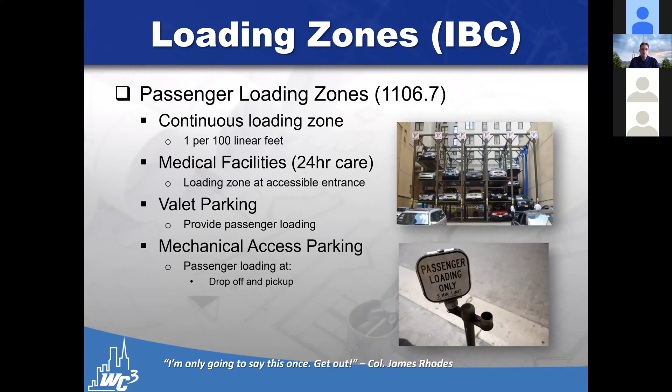Assembly seating areas, same service. This is where we talk about providing the same service. So whatever services you provide to people that have no disabilities, that are fully able-bodied, you have to provide the same service to persons with disabilities. So I was talking about this in a theater, and this is where things get tricky. They wanted to put a cry room in a movie theater. And if that is a facility or a service that's going to be provided to persons without disabilities, that's a service that has to be provided to persons with disabilities.

If you have a dining theater or an area where you can eat food, it has to be done the same way. And so I ran into this, oh man, I can't even think of the name of it. We had several luxury booths in this auditorium. And as they looked at the luxury booth, they had a dining table, and then they had seating, and the seating area had a little tray that you could put your food onto.

And so we came in and said, no, the seating has to be fully accessible, but the dining table and chairs now have to be accessible, because you're providing a service where I can sit and watch the show and eat my food as an able-bodied individual. And so a person with a disability has to have the exact same feature. If I provide chairs, wheelchair seating...

I will opine on Kelly's question. I don't consider a break room a kitchen, and so I would allow egress through one. I have had building officials fall on that a different way. So that being said, for accessibility, break rooms are kitchens, and they do have to be made accessible.

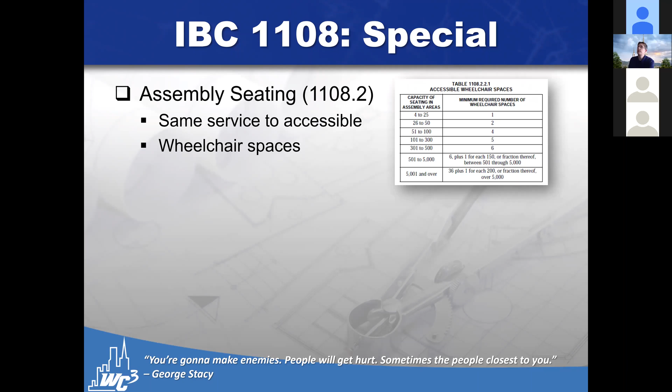So wheelchair spaces are typically how we make general seating accessible, but just be aware if you provide different features or services, you have to provide separate services as well. Those wheelchair spaces have to be provided in locations with separate services. You go to this table, and the number of seats you have determines the number of accessible wheelchair spaces you have to provide.

General seating, you just go straight to this table. If you have luxury boxes, every single luxury box is counted individually. So for each luxury box, you jump to this table by itself and you address it. And so every luxury box in the facility will have some accessible seating within it.

For all other boxes, you still go to this table, but instead of going to the table for every box, you can take all the other boxes you have, add the seating together from all the boxes and go to the table just once. But the accessible seating must be dispersed such that at least 20% of your boxes have it. So if I have 5 boxes, at least 1 has to be accessible. If I have 6 boxes, at least 2 of them have to have accessible seating within them.

Team and player seating, I must have at least one of the team seatings there. So if I have an example of a dugout at a baseball stadium, at that baseball field, at least one of the 2 dugouts would have to have an accessible route and have accessible wheelchair seating.

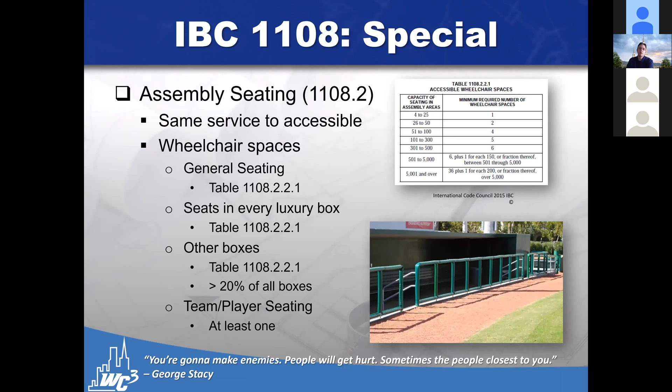The wheelchair seat, we're going to assume that persons in wheelchairs are not going to these events by themselves and must be provided with a companion seat. The companion seat is not an accessible seat whatsoever. It's just adjacent to the wheelchair space so they can sit with someone.

Dispersion, you have to disperse them on the main floor level and then 1 for each of the additional 2 levels. And so we've kind of talked about this, but if I'm in a theater and it has a main level, a mezzanine, and a second story, the main level has to have wheelchair seating, and then either the mezzanine or the second floor has to have one.

If I have a main level and a second floor and that's it, no mezzanine, the main level has to have one. And even though it's only one additional story, the second floor has to have one as well. So I can't skip a level until I have at least 2 additional levels above the main level, if that makes sense to you. So just be careful as we look at that.

How does the code distinguish between luxury boxes and other boxes? The code does not distinguish, the designer does. So that's up to you to tell them what a luxury box is and what it is not. How ADA is going to govern it is basically saying, are you providing different features in this box than the other boxes? If all the boxes have the same features available to them, then there is no such thing as a luxury box.

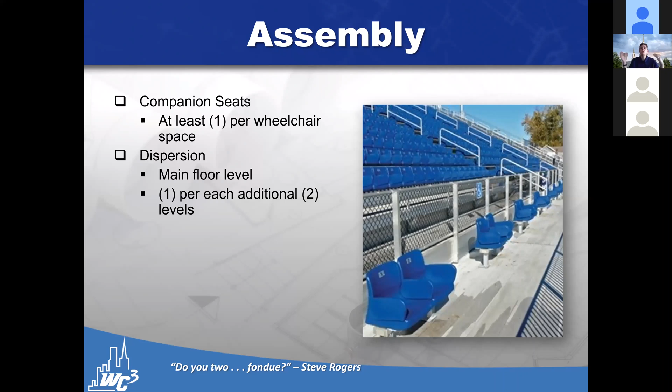But if certain boxes have better features, like maybe a box has a kitchen or a dining area, or maybe one of them is catered, then that would be considered a luxury box because it provides a service different than what the other boxes provide. But I did another facility and they only had 2 boxes. And I did another one that had 8 boxes and they were all the exact same. So as long as the boxes are all the same, none of them are considered luxury because the boxes are all identical.

Some exceptions, and I want to highlight this. If I'm in an area that's for worship, with less than 25% of the seats on the mezzanine, I don't have to have any wheelchair seats on the mezzanine. This is one of those cases where I'm going to point out that mezzanine doesn't need to have an accessible route if all it provides is seating and there's less than 25% of the seating on that floor.

This exception gets you out of making that mezzanine accessible. And so now I don't have accessible features, so now that mezzanine doesn't have to be on an accessible route. The same situation applies to any building with a mezzanine as long as there are less than 300 occupants. So unlimited occupants in a worship area, in an assembly area with less than 300 seats, as long as I have less than 25% of those on the mezzanine, it doesn't need to be done.

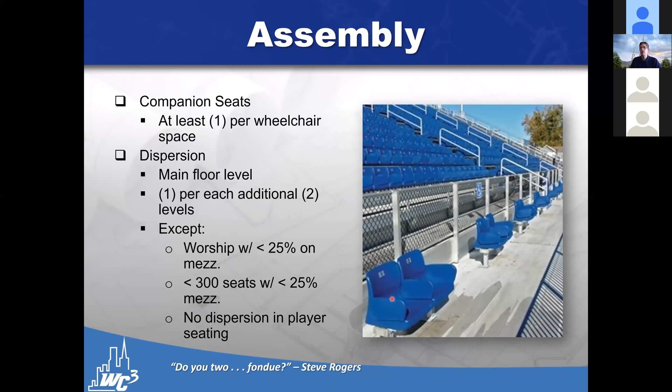And then there's no dispersion required in player seating. And so in that situation, if I had that dugout situation, again, if there was a bench for the players at grade and another bench down below, I would not have to provide the wheelchair seating at the lower level. I could provide it at the at grade level, as long as there was player seating in both locations.

Designated aisle seats. This is the number one item that gets missed in assembly seating. We remember the wheelchairs, we remember the companion seats, but we forget designated aisle seats.

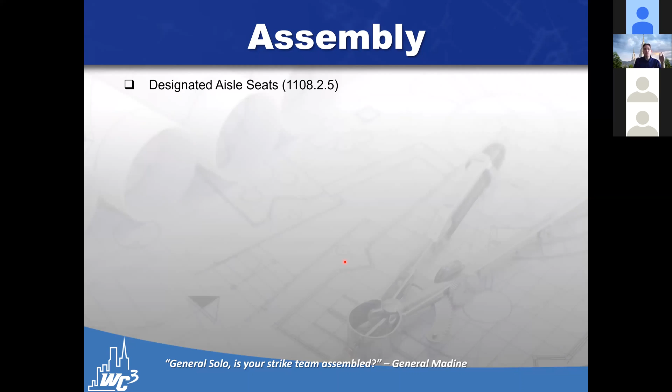I went and watched a play a while back. I don't actually go to playhouses very often, but it was the Glass Menagerie, so I decided I had to see it. As I watched the play, I sat in the middle of the row and realized that the demographic for watching plays, and maybe this is why I don't go to them often, is predominantly older individuals.

Looking at that group of individuals, I realized several of them were ambulatory. They could walk, but with a walker or a cane. As they came down the aisle, that was one thing, but maneuvering down the access aisleway in between the seats was very complicated. It's very hard if you're semi-ambulatory or ambulatory with some disability to negotiate down the row of seating.

What the code says is at least 5% of the seats on the aisle need to be designated for persons with disabilities. This is not for a wheelchair, this is for an ambulatory person who just can't walk down the row. You have to reserve the seat on the end for them. The code says you put the international symbol of accessibility there, and that seat is reserved for someone with a disability. 5% of all your seats have to be done that way, and they have to be the seats nearest to the accessible route.

If the accessible route comes into the bottom, that's where all your wheelchair seats are. As you move up the aisleway, the first 5% of aisle seats are the ones that should be designated as aisle seats. If you provide an armrest for the individuals from the rest of the chair, you have to provide an armrest for the aisle seat too.

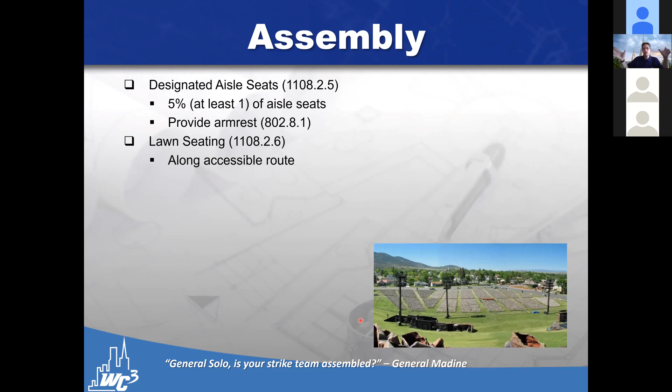If you have chairs, they did have to come in and put a flat, smooth surface leading to the accessible seating provided in that area, and it had to be dispersed throughout. But as long as you're just out in the lawn and grass, the accessible route just comes to the edge of the grass.

Audio amplification: any time a building has audio amplification, speakers or microphones used for an assembly purpose, you must have this sign and provide receivers per 1108.2.7. If you have a ticket window with a mic that they speak through and you can't understand them as they ask how many tickets you want, you have to have an assisted listening device available at that ticket window as well. And for public address systems, if you have a Jumbotron serving more than 15,000 people, closed captioning must be provided.

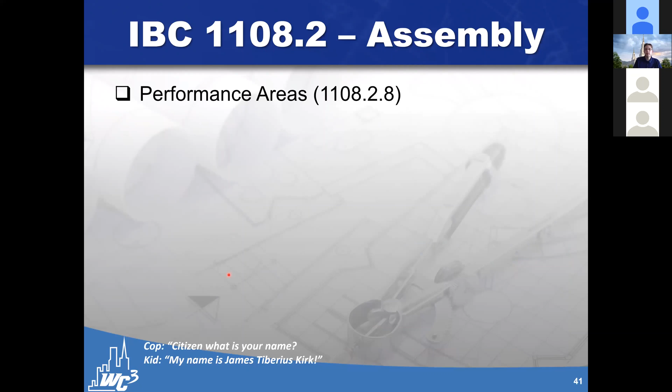Performance areas - I've run into this before. If I have a stage or a platform, and I provide a route from the seating area onto the stage, you have to provide an accessible route. If there is no route from the seating area to the stage, you don't have to do that.

I've been in one play in my life, and that is it. It just so happened that in that play, I had a scene where I entered the stage through the audience. I came in from the back of the audience, ran down the aisle, and then ran up onto the stage.

I also went to a conference, I think it was Jason Momoa up there, and it landed into a huge problem because they invited someone from the audience up. The first person just walked up the stairs, and the second person invited up was in a wheelchair, and they had to stop the conference and wait almost 10 to 15 minutes to find a way to get the wheelchair into the back room and then up onto the stage.

So be very careful. Again, that's the issue. You can't provide a service to persons that are fully able-bodied and not provide one to persons who are not. The second one is an accessible route must always be provided for the performers.

I had one where they wanted to do these spiral stairs and have the changing rooms located up above the stage. As they were looking at that, we came in and said no, if you have a changing room up there, an accessible route must be provided for the performer onto the stage. This is one of the locations where a platform lift can be used.

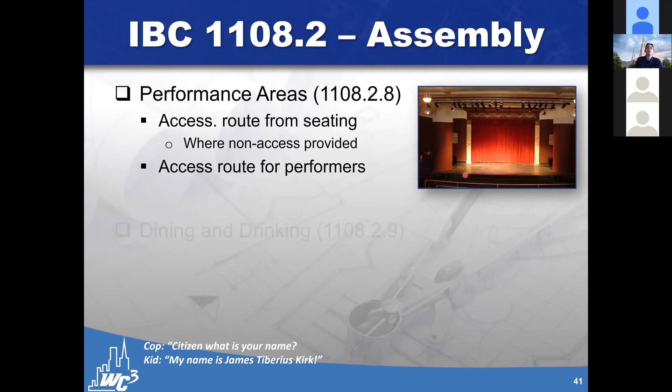Dining and drinking facilities: 100% of the dining area must be on an accessible route. The exception is if I have a non-accessible level, or if I have less than 25% of the seating. So 1104.4 tells me that if I was less than 3,000 square feet, I don't have to make that level accessible. So if my restaurant is less than 3,000 square feet on the second story of the building, I don't have to provide an accessible route to that level.

5% of all the dining surfaces must be accessible. Please be aware this also includes bars. So if I have seating at a bar, 5% of the seating at the bar must also be accessible. In order to qualify as accessible seating, you need knee and toe clearance underneath, and the bar would have to have that clearance for a forward approach. So that's normally my biggest issue with bars—they have to extend the counter to create accessible 5% seating.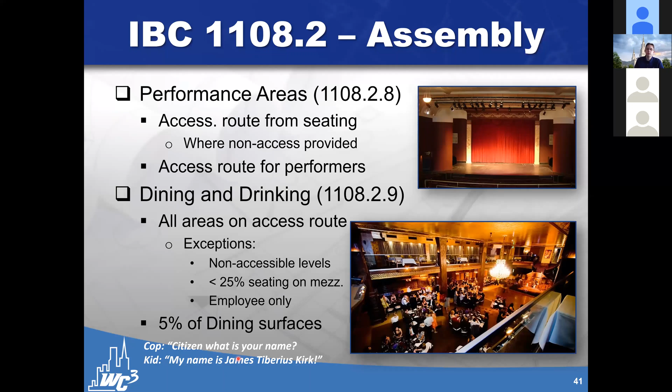We go to 1108.3, and based on the number of storage facilities provided, we determine the number of accessible facilities that have to be there. This is the one that's a nightmare. We disperse them among classes. Well, how do you classify self-storage facilities?

Typically, the best way to do it is, simply heated and unheated, exterior access, interior access. Heated and unheated is a clear one. Normally, it's going to be cost. You're going to look at cost ranges and say, I'm offering, and the idea is to offer equal services. If I can go rent a 500 square foot storage facility, but if I'm disabled and the only one available to me is the 2,000 square foot storage facility, that's not fair.

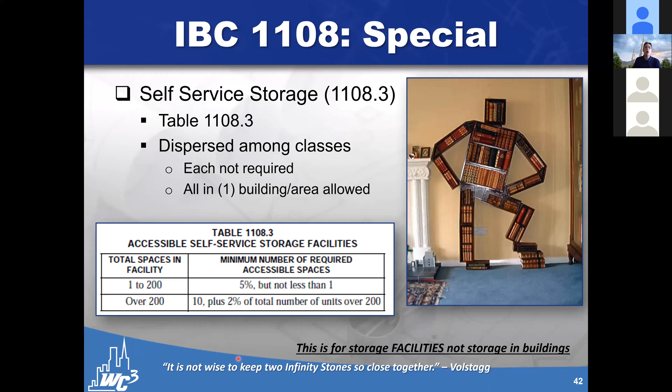So it has to be dispersed among classes. That doesn't mean that each classification has to have one. It just means I can't have more than one until I have at least one of each. You are allowed, in self-storage facilities, to often have multiple buildings throughout the space. Instead of having to provide an accessible route throughout the entire complex, you're allowed to put all of the accessible features in a single building so that the accessible route only needs to be provided to the one building. That's typically how I see that done in the field.

Do you have to have accessible seating directly at a bar if you provide accessible seating near the bar? The code says it has to be dispersed throughout, so it's not extraordinarily clear, but the biggest issue I typically run into with bar seating versus main seating is that a bar is a fixed featured element, and the code says that 5% of all fixed seating must be accessible. Whereas 5% of your free seating is accessible, and those are counted separately. So it almost always forces the bar to have an accessible feature.

Now, if you had other fixed seating that was accessible besides the bar, you could use that in lieu of the bar seating being accessible. So if I had fixed seating at the bar, and then fixed seating at a booth or something else in the area, I could disperse my 5% that way. But again, the code's going to say the second I need to have two, you have one at a booth, the other one should be located at the bar itself. So be careful about using that on your dispersion requirements.

Courtrooms always have to have a wheelchair space for the jury box. So sorry, being disabled doesn't get you out of jury duty. For the gallery seating area, so that people can come in, we're going to go to table 1108.2 for that. They're always required to have assistive listening devices, and the employee work area must be on an accessible route.

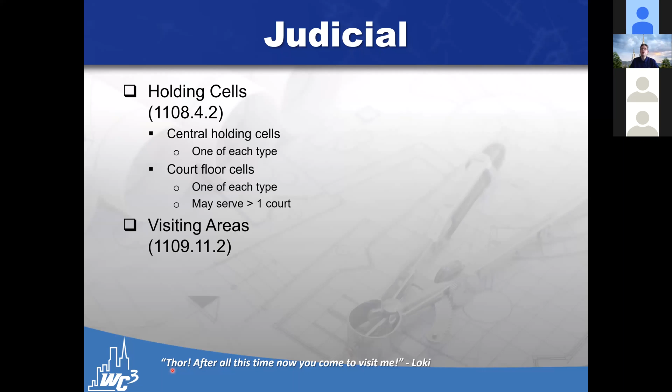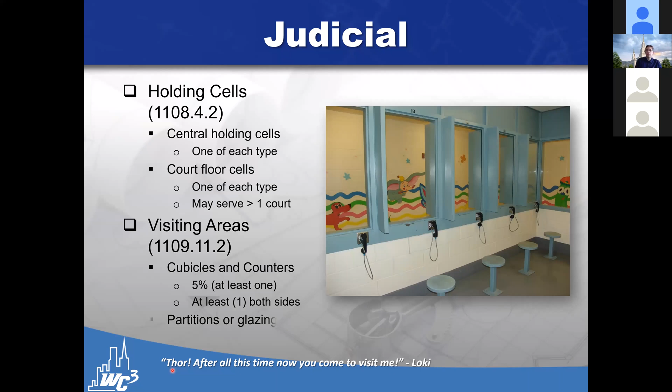Visiting areas, this picture always disturbs me because I've got all these children pictures at a prison visiting area. That's kind of frightening, but at least 5% of them have to be accessible, and at least one has to be accessible on both sides so that a person with a disability can visit a person with a disability. Where there are partitions and glazing, at least one of those partitions has to be at the accessible height location to view through.

Okay, we are going to get a chance to get to toilet rooms, which is good because I postponed some questions and I hope I'm going to answer them now. What the code says is that each toilet room in a building has to be accessible, and at least one of each fixture provided in that toilet room has to be accessible. So here's a handy dandy accessible toilet that has a remote control.

On top of that, what that means is that there are some exceptions, but if I have a second floor of a building, there may be no accessible route, but every single bathroom, toilet room has to be accessible. If I have a live-work unit and I decide to share the bathroom with the working space, I have in that bathroom a lavatory, a toilet, and a tub. Well, the tub might be just for the dwelling unit, just for the person that lives there, not for the employees and not for the public.

Because it is a fixture in a bathroom that's accessible, the code says all of them have to be accessible. So everything inside the accessible bathroom has to be made accessible. The exception, the first exception, is private offices. So this is common - I have a bathroom on the second floor of a building, I have a private office on the second floor, there's no accessible route up there, and it's going to be used only through the private office. I see this all the time in auto dealerships. So the code says the private office doesn't have to make the bathroom accessible.

Now, I want to highlight that it's still a fully accessible bathroom. What the code says, if you look into the exceptions, is that you do not have to provide the grab bars - you just have to provide blocking for future grab bar installation. You're allowed to have a cabinet underneath the lavatory as long as it's removable, and the door can swing into a clear floor space as long as you can switch the swing of the door to make it accessible later. So it has to meet all the requirements for a fully accessible bathroom, even though it's only in a private office, even if it's only on the second floor of a building. Fully accessible, no exception - the exception is just that some features can come later, like not installing grab bars right away and having a cabinet underneath the sink.

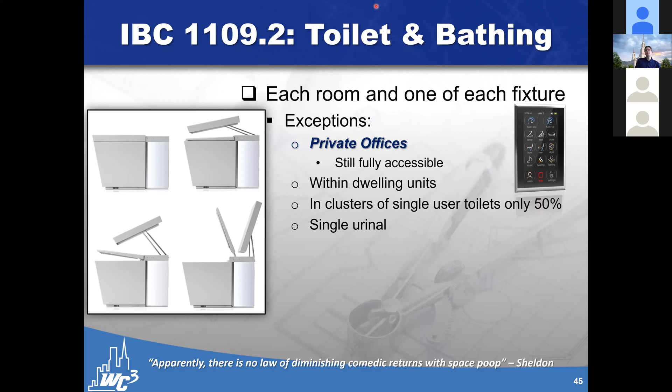If the toilet room only has one urinal, that urinal is not required to be accessible - the accessible urinal is the second urinal. Toilet rooms in critical or intensive care sleeping units in I occupancies are not required to be accessible. Even though the room might be required to be accessible, the toilet room isn't, because they're going to use the toilet with assistance. Same for bariatric patients.

Primarily those used for children's use, children's toilets, don't have to be accessible - no, that's not what the exception says. They meet the accessible requirements for children's use. A 17-inch tall toilet doesn't work for a child in a wheelchair. So if you're dealing with an area like a daycare or an elementary school where you primarily have children using the toilet facility, you need to meet the children's use accessible requirements.

Privately funded apartment complex - what are the requirements for fully accessible units at accessible floors? So that's an interesting question. We're not really jumping into 1107 today, but just to answer that: as long as it's an R2 apartment complex - R2 being the use group - and it's permanent dwelling spaces intended as residences, not a timeshare facility, type accessible units are not required for that facility. Only type A and type B for most apartment complexes. So you would not have any fully accessible units in a typical R2 apartment complex.

All right, unisex toilet rooms. This is kind of a unique one - the unisex or family assisted use toilet room. These are required in A or M occupancies whenever I have an aggregate of more than at least 5 men's or women's water closets required. Now, it's not 5 men's or 5 women's - it's more than 5 total required. And again, it's not provided, it's total required. So I go through the plumbing requirements in 29, I determine the number of fixtures. The idea here is, my mom was in a wheelchair, and so when I used to go places with her, if I'm going to an A or an M occupancy, that means I'm going shopping or I'm going to watch a movie.

Water closet compartments: wheelchair stalls are the ones with the larger stalls. 5% of all compartments must be wheelchair accessible, so at least one always. For ambulatory stalls, if I have at least 6 toilet rooms, bathing toilets, or urinals in a single room, one of them has to be an ambulatory stall. 5% of the remainder must be ambulatory.

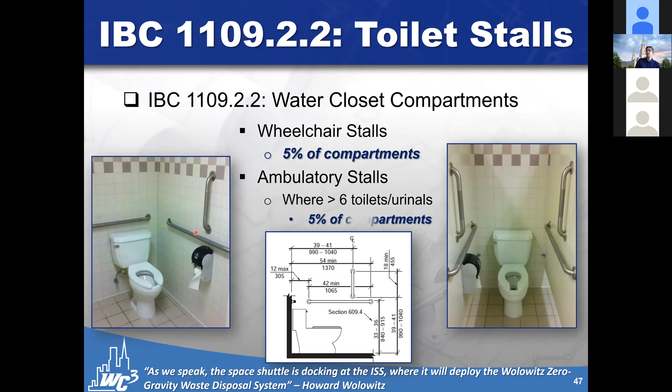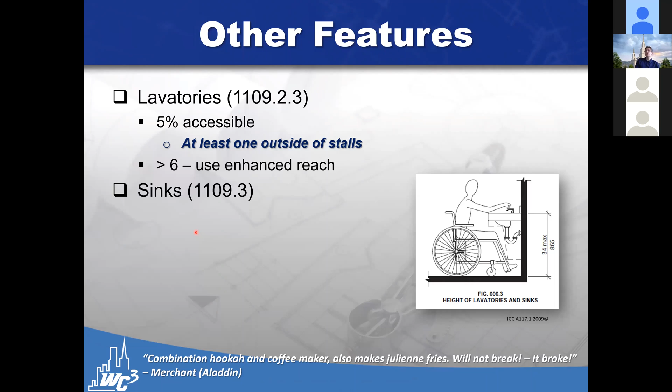Lavatories: 5% of all lavatories have to be accessible, and at least one must be located out of the stall. Once I have 6 or more, I have to use the enhanced reach range, meaning I don't reach over the sink to get to the faucet—those are for little kids or smaller people to use. 5% of all sinks in the building, not including mop sinks or other work sinks for employee use only, are required to be accessible. Kitchens and kitchenettes are required to be accessible—that's your break rooms.

Drinking fountains—I want to highlight this, probably the most important thing I'll say today. The trick question is, you always have to have a minimum of 2 drinking fountains. Which one's accessible? The trick answer is, they both are. The standing person drinking fountain and the drinking fountain for persons in wheelchairs are both accessible drinking fountains. This is unique because the code requires that 100% of drinking fountains are accessible, but they're supposed to be split evenly between drinking fountains for standing persons and drinking fountains for persons in wheelchairs.

The issue is, if you're over 6 feet tall, or if you have arthritis or other difficulties, you can't bend over to the 34-inch high wheelchair drinking fountain. So you need to have the standing drinking fountain for that individual. So again, put the standing drinking fountain as high as possible whenever possible.

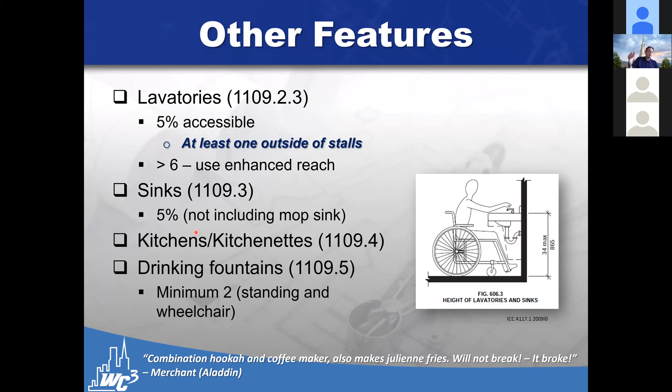Saunas and steam rooms, 5% must be accessible, must include a bench and a turnaround space. Storage, this is shelves and racks inside an individual building. Closets, 5%, but one of each type must be accessible. You must provide the same type of facility as non-accessible. So if I have a coat rack, I need an accessible coat rack. If I have a cabinet, I need a cabinet. If I have drawers, I need drawers.

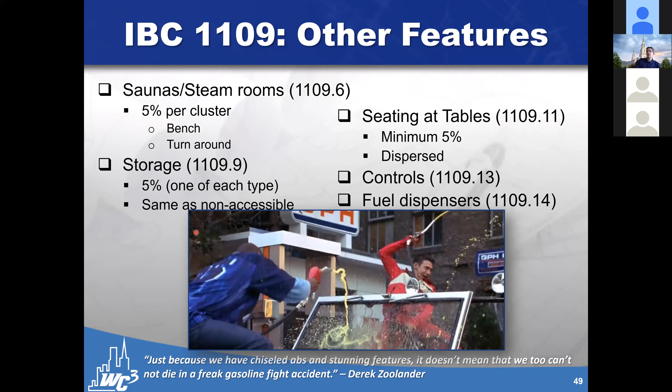Seating at tables, 5% of all tables, and this is not fixed tables, this is free tables, must be accessible, and it must be dispersed throughout. You can't have all of them at the same table. Controls must be accessible. Fuel dispensers, and I just love this picture, and this one goes with a quote. Fuel dispensers are required to have accessible reach range, but the actual dispenser allows pinching, and that is permitted. Typically that's not permitted, but for a fuel dispenser, that pinching is allowed.

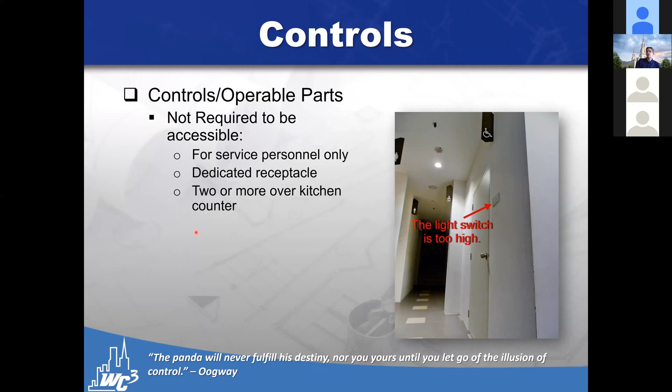So again, if you have an express checkout, a self-checkout, and a regular checkout, it doesn't matter how many you have, but you have to have at least 1 of each. So if those were the only 3 you had, a self-checkout, an express, and a regular, that's 3 different checkout types. You come up here, the table 1 to 4, it says you only need 1, but you have to provide at least 1 of each. You have to disperse them again. You can't put all of the accessible at one end of the grocery store and that's it.

Sales counters, we normally run into these POSs as they're labeled on the drawings in various locations. So a sales counter is only required to be accessible, 1 of each type, 1 per location. Location is normally the one that kills me because in department stores, they get scattered throughout, and so you normally end up having to make every single one accessible anyways.

In food service lines, 50% of the self-service shelves have to be accessible. Then you don't have to provide all the food on that shelf. The trick is to put all the desserts on the accessible shelf so more people will buy them. And that's fine, only 50% of the self-service shelves have to be.

But the entire queue and line coming into a building for a self-service food or for a food store has to be accessible. Watch out for these buildings that have the queues or the lines coming into them, such as the Costa Vidas, Cafe Rios, where they create this little line going through. You have to have the turning spaces and everything else inside those as well. So make sure we've got adequate width.

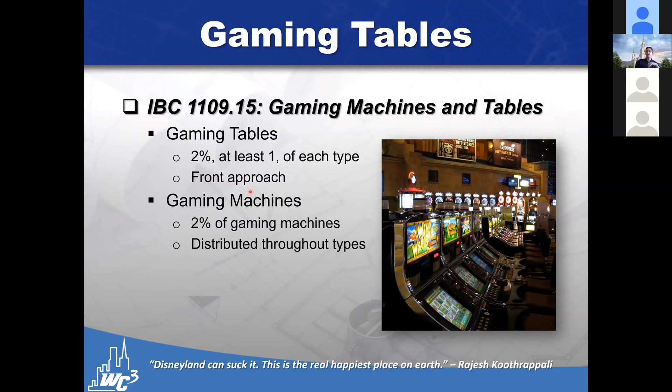The next one we're going to look at is gaming machines. So that's like our slot machines here. 2% of the gaming machines have to be accessible, distributed throughout the type. So you can't just make it all the one type, but you don't have to have one of each. You just distribute it throughout. Again, a forward approach is all that's required. I'm going to stop at recreational facilities because we're out of time, but hopefully I've covered everything.

Looking at the last question that came up from James, is a side approach acceptable for break area style sinks? There are some exceptions in ICC A117, and so as long as there is not a cooking surface, you are allowed to have a parallel approach for a sink and a kitchenette. So a break room sink, as long as there is no cooktop, you can have a side approach to that sink. So yes, there are some exceptions in there.